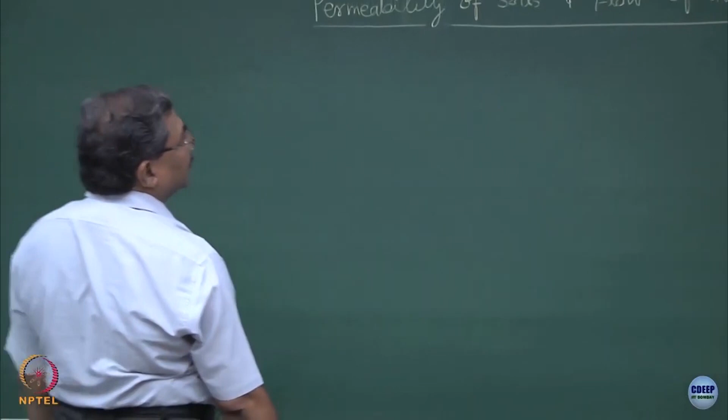So to begin with, the permeability of soils and the flow of groundwater. To make life simple, we assume that the soils are saturated. This is assumption number 1. If you do not assume the soils to be saturated, this becomes a completely different discussion which falls under the realm of unsaturated soil mechanics.

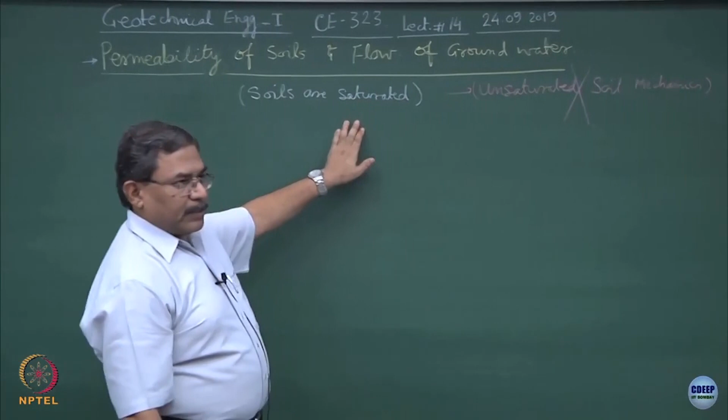At undergraduate level I will not be discussing the unsaturated state of the material, because the flow of water becomes extremely complicated and cumbersome, and I will restrict my discussion to the permeability of saturated soils, or the flow of water through saturated soils. You have enough exposure to what capillary action does, what the unsaturated state of the material does, what the dry state of the soil does, and so on.

So the best way to understand this whole process would be to recall Bernoulli's theorem, which you must have studied in your fluid mechanics course.

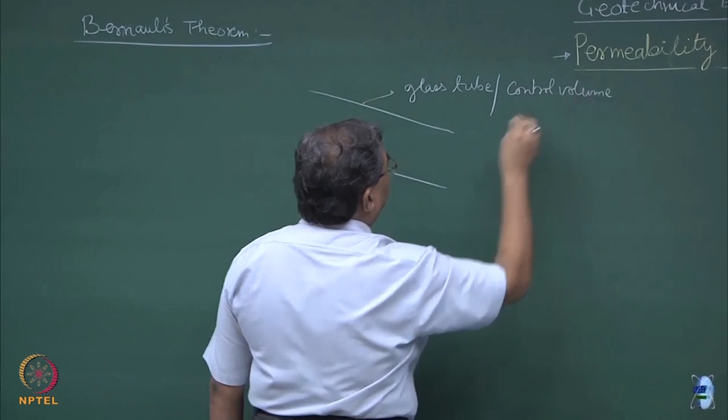Suppose if I take a glass tube, and allow flow through it, this glass tube can also be considered as a control volume. Or this could even be a pipe through which the flow is occurring.

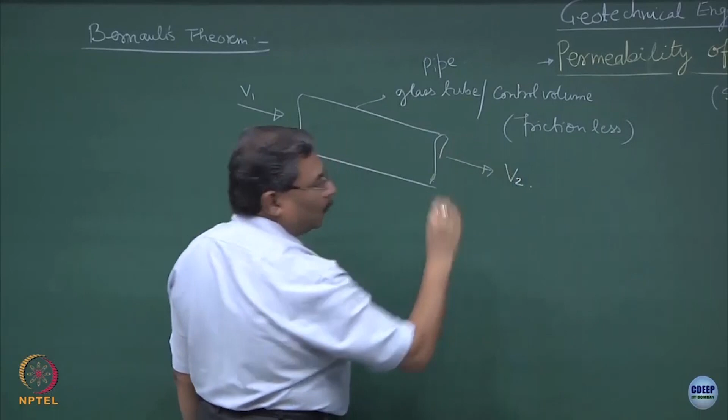Now suppose if I assume that this glass tube, pipe, or control volume is frictionless. In your hydraulics course, when you deal with flow through conduits and pipes, you apply the friction factor as a C factor, alright. But here, for the sake of simplicity, we are assuming there is no friction induced from the glass tube, pipe, or control volume. At this point the velocity is V1, and at this point the velocity is V2. If I know the area of cross section here as A1, and area of cross section here as A2...

What we are trying to do is find out what causes flow of water between point 1 and 2. I am sure you must have done this exercise. If I consider a datum somewhere here, I know what heads are acting at points 1 and 2, and the head difference is going to cause the flow to occur.

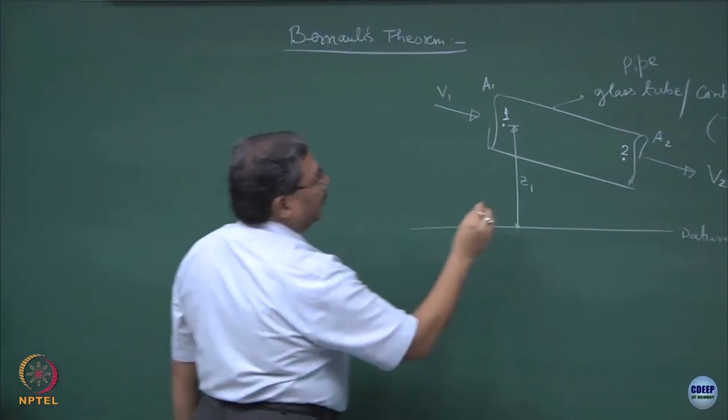So if I say at point number 1, the height of point 1 is, let us say, Z1. Now Z1 is defined as the elevation head, Z is defined as the elevation head, in meters or centimeters or whatever.

So point 2 is located, let us say, here at an elevation head of Z2. Now suppose the pressure head at this point, which I am defining as P1, and pressure head at point 2 I am defining as P2. So P corresponds to the pressure head, and the units will be the pressure units.

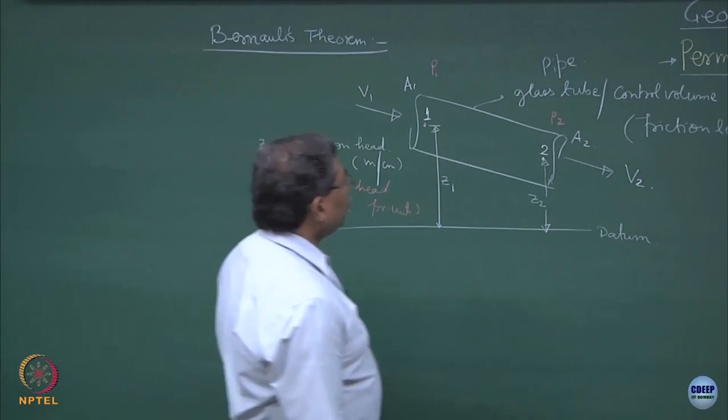If I divide this by the density of the fluid, this becomes the height of the fluid, and the pressure can be converted into the height also, alright. So we have elevation head, we have pressure head, and the third one, I am sure you must have studied, is what is known as the velocity head. Normally this is defined as V square upon 2G.

Put together, that is 1 plus 2 plus 3, is known as the total head. So if I say that the total head at point 1 is greater than total head at point 2, the direction of the flow is going to be from 1 to 2. Is this okay?

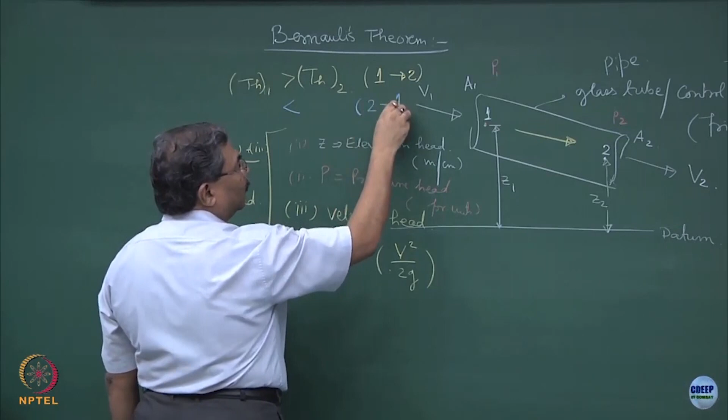However, if I reverse the situation and say that TH2 is greater than TH1, the flow is going to get reverted, it will be from 2 to 1. So what we are trying to analyze is a situation where we can establish the direction of the flow in a glass tube. This is nothing but your Bernoulli's theorem.

Now most of the time when we use these concepts in cases like soils or porous media, what is going to change? Suppose if I want to extend this to porous media. Porous media means, yeah, you have some doubts, yes please. Total head said is a general situation, okay. So your objection, but I have given A1 and A2, area of cross sections are different, so V2 is different than V1, I think this is okay.

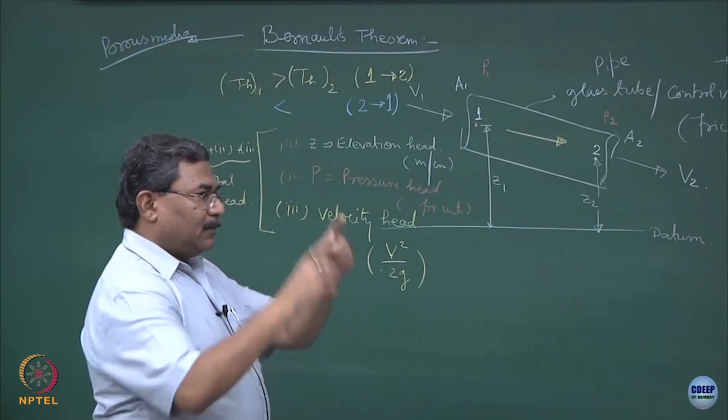Yeah, I will come to this point, just keep this in mind, alright. So for the time being there are no frictional effects, we are ignoring it, and we are trying to see whether the total energy concept can be utilized to establish the direction of the flow. Total head, always total head, velocity also has to be included, elevation has to be included, pressure also has to be included, always remember.

Yeah, I will come to that, but unless you have created a context, what you are saying is not correct. So now let me create the context, and that is what I was trying to do here. So the moment you extend this theorem to the porous media, now what you are saying is going to be correct. That means what I have to do is introduce an element of a porous media somewhere in between, alright.

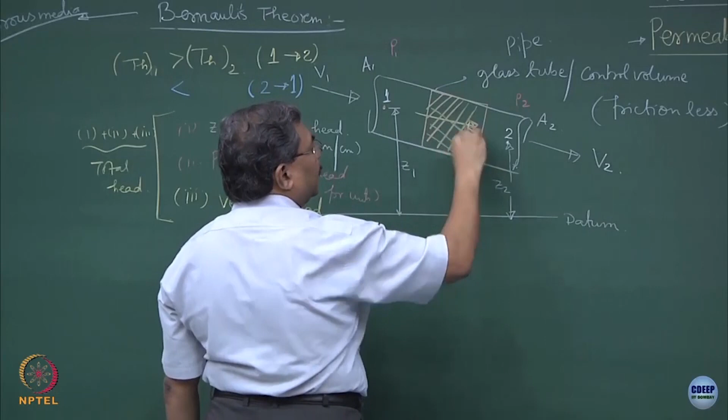So suppose if this is a compacted soil mass, what I have done is I have taken some soil in the loose form and I have compacted it within this tube to create this state of the compacted soil mass. So when you say compacted soil mass, the attributes of this control volume are going to be porosity, void ratio, gamma d. So this is a state of compaction, saturation.

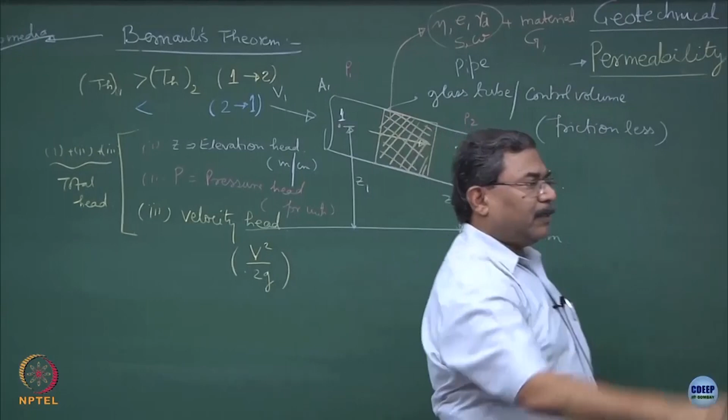Okay, moisture content, and what else, the material. Is this correct? So material is represented by, let us say, specific gravity, particle size distribution. What is the best way to depict particle size distribution here? The entire graph cannot be fitted, sorry, better than that, sorry, very nice, good.

So let us say D10, or dx for that matter, clear. Normally D10 is used to define the material, and hence we call this D10 as the characteristic dimension of the porous media. Choice is yours, you can take dx also, but when you say standard terminology, this is D10 normally we use to define the material.

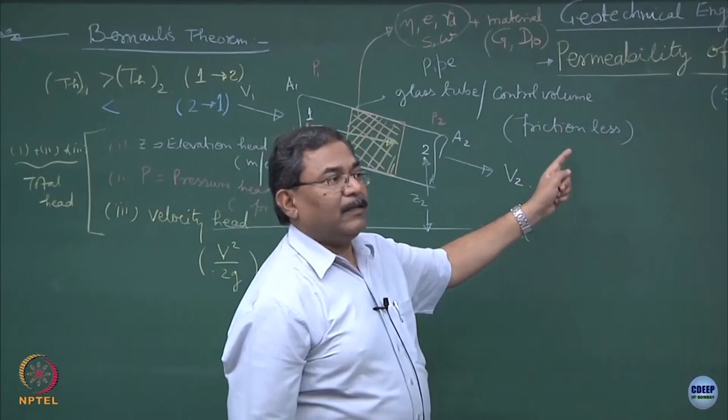So look what we have done, we started from Bernoulli's theorem and we are now extrapolating it to the porous media by including a porous media over here, fine. Henceforth now we will be discussing about the flow through porous media. Is this part okay? Everybody has followed this? Any question? Fine.

So now coming to, we have defined the porous media in the form of its compaction state and the material. Now what is going to prevail the flow? One is definitely the total energy, and the second would be the Reynolds number, alright. So we have to define the Reynolds number.

You remember what is Reynolds number? We define it as Re. So truly speaking, this is the ratio of inertial forces to the viscous forces.

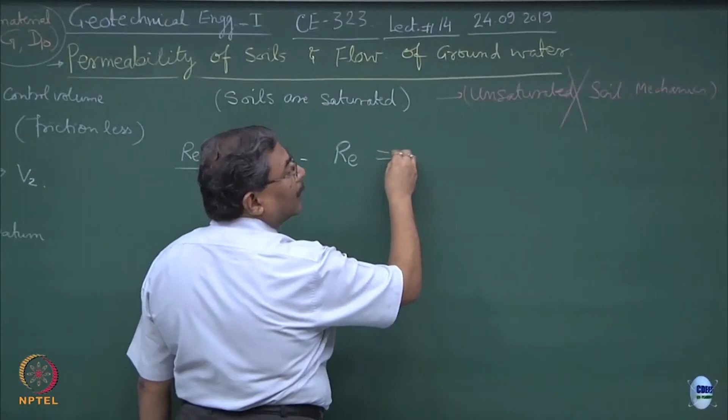Two things you should remember, never get confused. What will be this D term? Characteristic length or the diameter, correct, you are right. So I can say this is D10, and V happens to be the velocity.

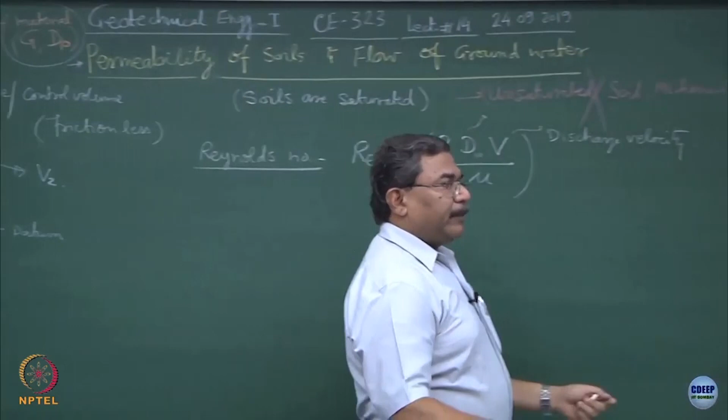So, whatever we have been talking about was always discharge velocity. Discharge velocity is devoid of the porous media. I repeat, discharge velocity is devoid of the porous media, as if porous media does not exist. What are the possibilities when porous media will not exist? The only possibility is what we call as preferential flow.

That means what is going to happen? The water... the porous media provides the resistance to the flow of water. Clear? So, everybody wants easy life. So, what seepage has done, what discharge has done? It has short circuited the sample itself. Now, this is what is known as a preferential flow.

Preferential flow is at the interface of two materials mostly. Chances are when you are compacting the sample, the contact between the glass tube, the pipe or the control volume and the soil mass is not perfect, and hence whatever discharge is taking place, this might take place through the preferential flow.

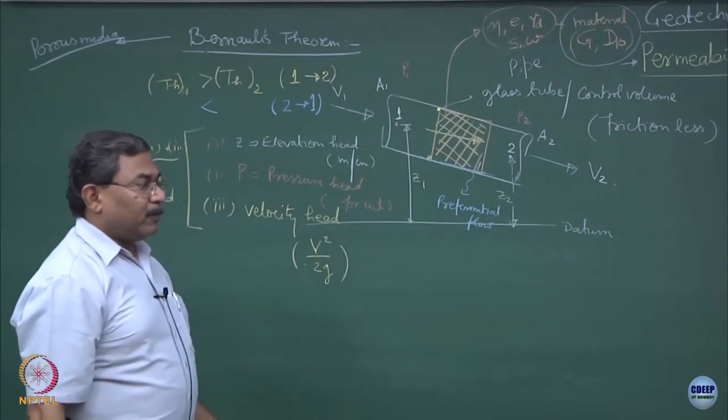However, if I curtail this preferential flow, you will ask why, how? So, I may put a rubber gasket over here, or I may put some different types of resins, or different types of lubricants or sealants. So what I will be doing is cutting off the preferential flow, and now making this sure that the discharge is going to occur through the porous media only. Is the story clear? Is this fine? Yes, please. Okay, so now I am forcing the discharge to occur through the porous media.

So, what I have done by this whole manipulation, I might have created a laminar flow situation or a turbulent flow condition. So, you are aware of what are the laminar flow conditions, what are the turbulent flow conditions.

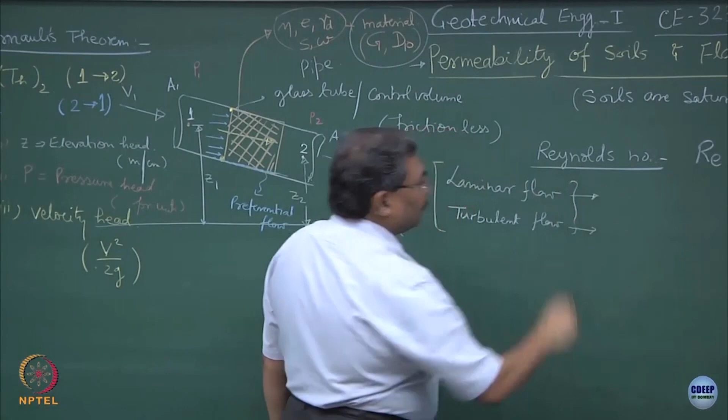If I zoom a certain portion of this sample, and if I show it over here, this is how the pores are distributed in compacted soils. So, these are the pores, and this is the soil matrix.

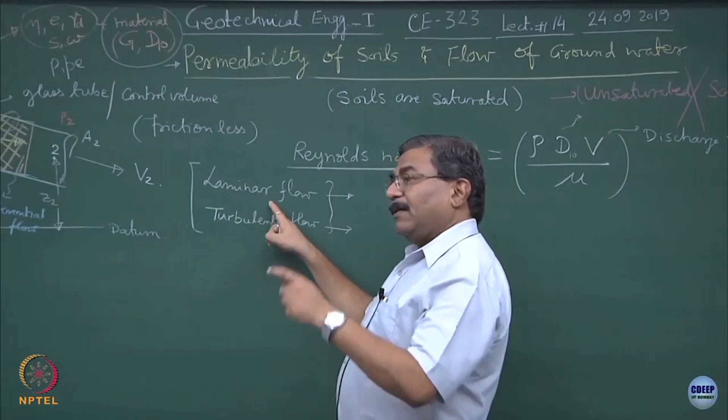As long as the flow of the fluid is parallel to all the flow paths, including the bends or the distortions, the chances are the flow might occur like this. There is a bend over here, again there is a bend, and if you take the next layer, these two are almost parallel to each other. So, as long as I ensure that the flow conditions are as if the flow paths are parallel to each other, including the bends, this is what gets followed in the laminar flow condition.

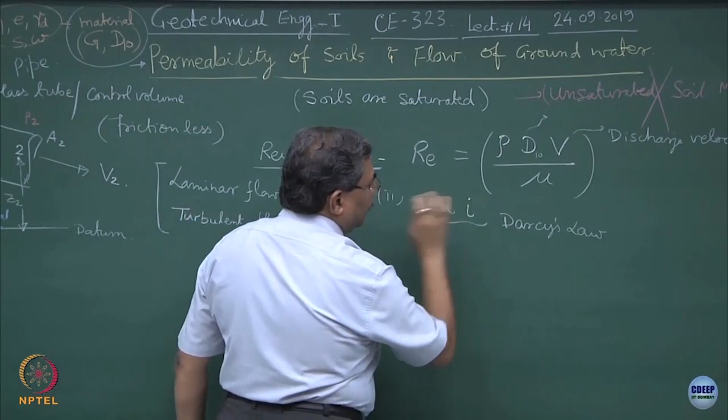The other characteristic of this type of flow would be, so this is the first condition. The second condition would be the velocity of fluid is proportional to I, and this is what is known as Darcy's law. So, Darcy's law is used normally for defining the flow through the porous media. It is a linearity. V is proportional to I, and if I say in generalized form I to the power n, this becomes a turbulent or non-laminar flow. So I will use this I here, this is Darcy's law, V is proportional to I.

If I say that turbulent flow or non-laminar flow is where this condition gets violated, this condition can be written as I to the power n, where n could be equal to 2. This becomes your non-laminar situation. The quantification of all this is done with the help of RE.

So, in case of soils, what we say is RE is less than 1. In your pipe flow or the flow through the conduits, you have taken laminar flow condition up to 2000, is it not? RE is less than 2000 is the laminar flow.

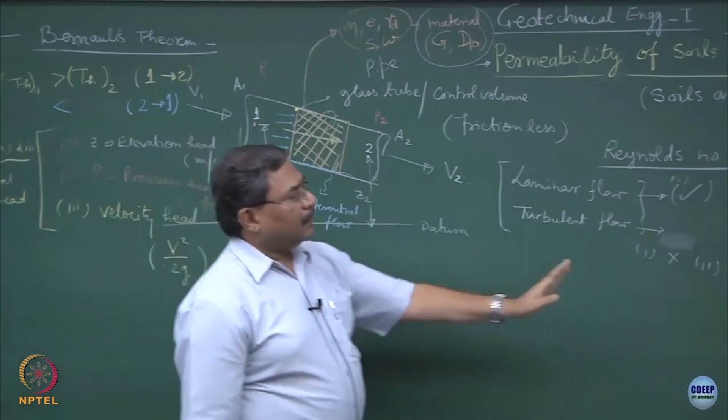So, what I have done, remember, we started from a pipe conduit and then I have stuffed this with the porous media, and I have created a situation where I have forced fluid to flow through the porous media and not get short circuited. Clear? Under all these circumstances, these are the assumptions or laws used to define the flow through a porous system. So, there are several ways of doing this. What you have to establish is, you have to just say whether RE is less than 1 or not. Density of the fluid is known, rho is the density of the fluid, mu is the viscosity that you know for the fluid, D10 you know, why?

Because you know the material characteristics, specific gravity and D10 from the particle size distribution curve, and at what stage you have compacted it. So, stage of compaction is gamma d, moisture content; if gamma d is known, porosity, void ratios are known and saturation is known. So state of compaction and the material is getting depicted here.

What fluid is passing through this is getting reflected by 1, 2 and 3. In other words, what we are studying is the interaction between the porous media and the fluid flow.

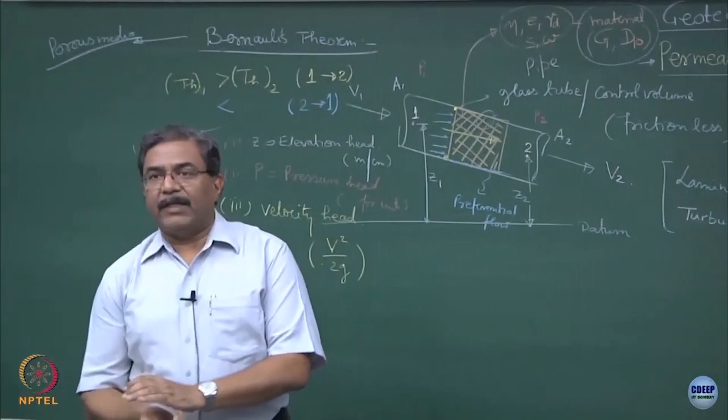Now this concept can be utilized by chemical engineers, civil engineers, hydraulics guys, petroleum geophysicists and so on. Their fluids are going to be different. Flow of hydrocarbons through the sediments, one case. Flow of sludges through filters, another case. For a biotechnologist, a solution having all sorts of bacterial activity, microbes in it, and trying to filter it to create a clean solution for various applications.

The concepts remain the same. Yes, we call this the characteristic length of the porous media. D10 is known as the characteristic length.

We never talk about the third dimension because all these tubes are going to be infinite in length, agreed? So it depends upon how long the porous media has been created, and I am not interested in that. What I am interested in is at this point what is happening, and if I am doing very precise modeling using a supercomputer or something, I will try to see how D10 is changing all along.

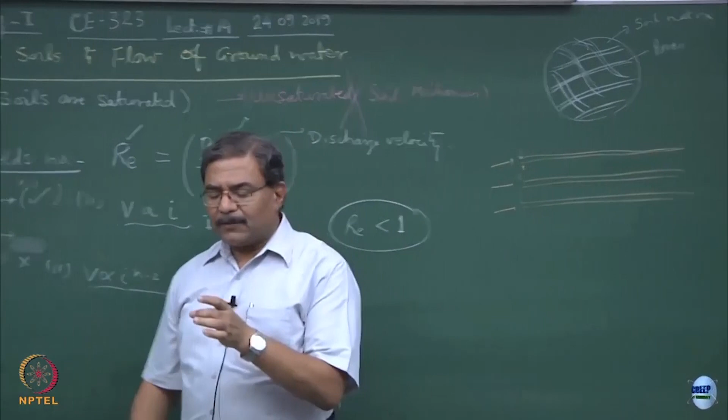But imagine you have a compacted soil mass and you have to see, realize and measure how the velocities and the pressures are dropping within the sample. It is going to be extremely difficult. We will discuss these things today.

So for the time being, we are not interested in lengths of these things, we are just interested in the characteristic diameter which is going to cause the flow of fluid into the porous system, and hence D10 is good enough for me. Why? Because D10 is going to define... yeah, that is a good question.

So now suppose if I say that this is a particle arrangement, what is the D10 here through which the fluid will flow? Yes, you are right. So this is the open space, and this space is going to depend upon the particle diameter. So these are the complications.

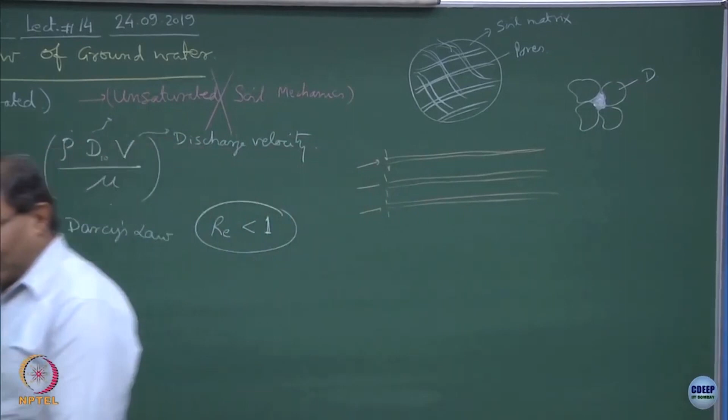I hope now you are realizing that flow through porous media is not a very simple subject. So now you are heading towards complication. Your next question would be, what is the relationship between D and this? Another question would be, what about the shape of the particles? Another question would be, how about the tortuous lengths and so on. So this is an evergreen topic to work on, and it has a lot of commercial value.

Okay, for the time being this is fine. Yes, please, anything else? Okay, so let us go ahead.

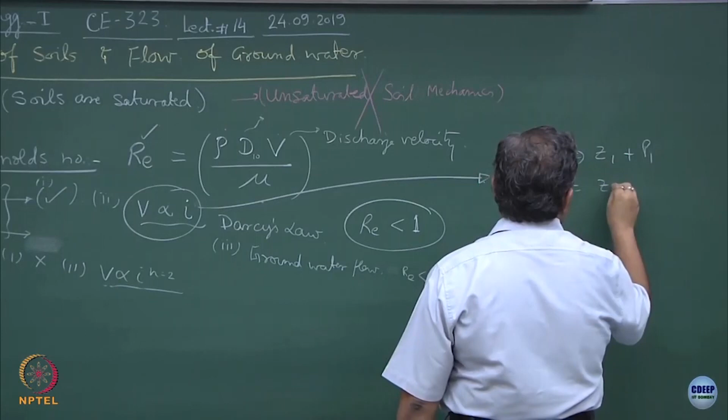If I say that TH1 is equal to Z1 plus P1, and TH2 is equal to Z2 plus P2, and if I put a condition that delta TH is positive, so it's inbuilt that Z1 plus P1 is greater than Z2 plus P2. Even if I rotate it and keep it on the horizontal plane such that Z1 becomes equal to Z2, what I have got rid of is the elevation heads, agreed.

So that means under these circumstances, when Z1 is equal to Z2, what I am saying is P1 is greater than P2. The pressure head is causing the flow of water to occur through the porous media, clear. And the easy way to understand this is by using a term known as I, the hydraulic gradient.

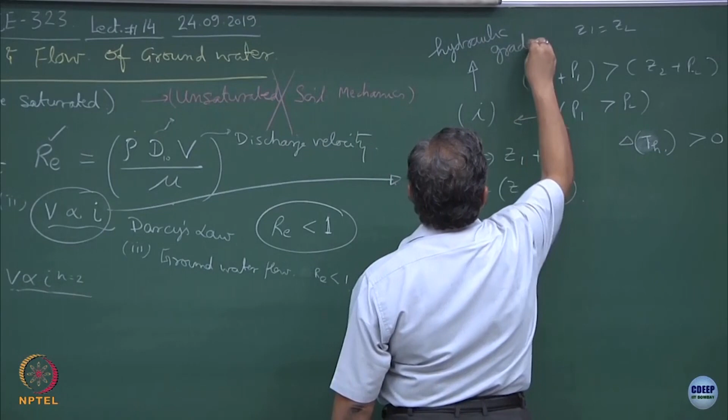So what is I? I is equal to delta P, divided by length of the sample, and length of the sample is, let us say, L.

Now how would I read this? One of the ways of reading this would be: P1 is acting at this point, or total head is acting at this point, total head is acting at this point. We have done some mathematical manipulation to get rid of Z2, it does not matter even if I include Z2. As long as the flow is taking place from this point to this point, energy at this point is higher than energy at this point, and the dissipation of energy is taking place per unit length of the sample.

So hydraulic gradient is the term which is defined to show how pressure is getting dissipated over a certain length of the sample.

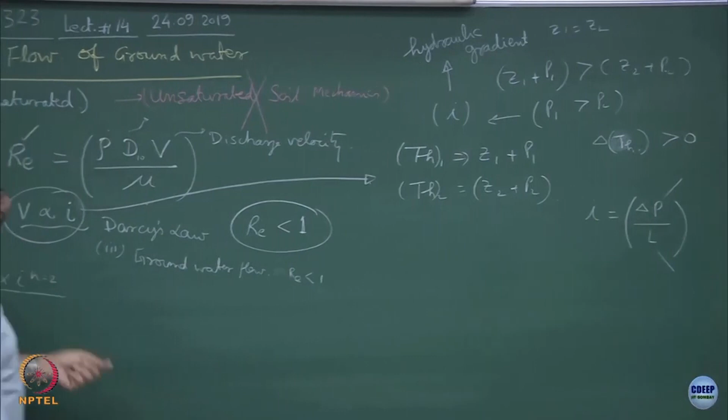Now your question is why it is not negative, okay. So what we have understood until now is V is equal to K into I.

Sometimes K is also known as Darcy velocity or Darcy's permeability, Darcy's coefficient also we call it as. We also call this as hydraulic conductivity, coefficient of hydraulic conductivity. Sometimes people also call this as the coefficient of permeability. It has different names.

This is the proportionality constant. What we have done is V proportional to I, we have changed to V equals K into I. Now suppose if I say it is I to the power n,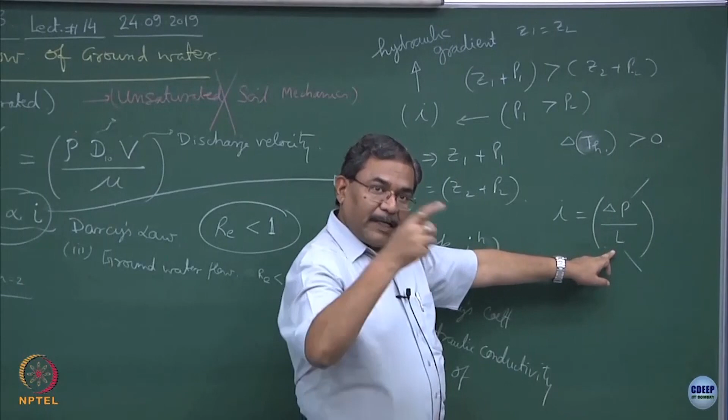I cannot be negative because what is the flux which is acting across the 2 points? A1 into V1, correct. So it is the flux which is getting dissipated in length L. This is another interpretation. So flux has to be positive gradient, agreed.

As long as the saturated soil is concerned, remember the moment this becomes unsaturated it is a different case altogether, so we are not talking about that situation. So as long as delta P is positive getting dissipated along L, your velocity of flow is going to be proportional to the hydraulic gradient, agreed.

It cannot be the reverse of that. What it says is if I increase the hydraulic gradient the velocities are going to be more, and vice versa, and that is true.

So this term now we have agreed that I will be positive. I can write another expression that Q is the discharge, and this is equal to velocity into area of cross section. So Q will be equal to K into I into A, alright.

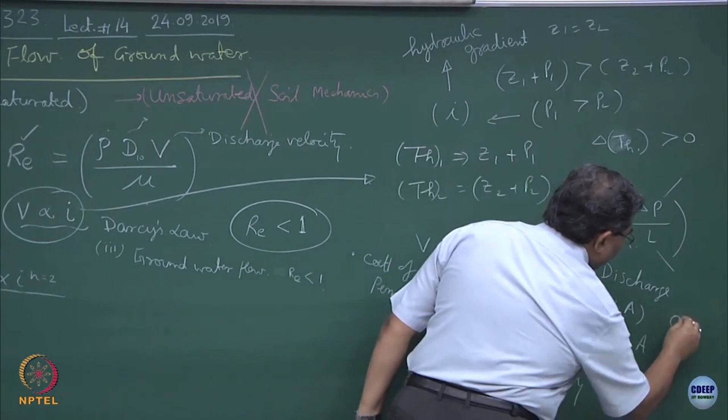And for your quick reference, if I say Q upon A, what is Q upon A? The small q. So small q is nothing but the flux.

Now, in today's world, how these equations are being manipulated, please understand in 2 minutes. We are talking about here all fluid flow, clear. What I have to do is, I have to apply a flux gradient to cause the flow of something.

Is this correct? So the guys who are working in the field of electromagnetism, what they will be doing? They will be applying electric field gradient across the sample to pass current. Chemical engineers, what they will be doing? They will be applying concentration difference across the 2 points to create a diffusive current.

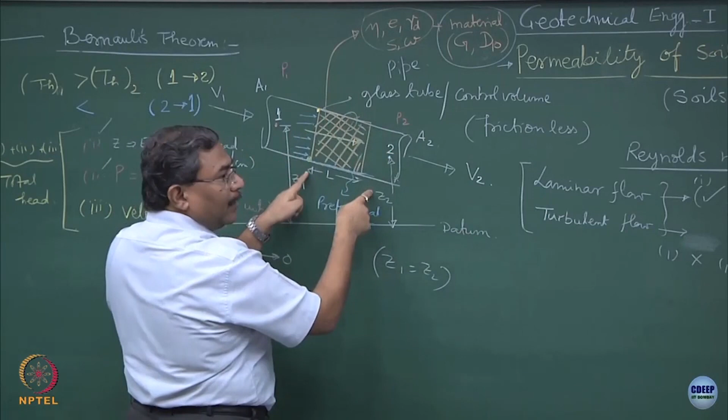Agreed? C1 concentration of chemicals, C2 concentration of chemicals, delta C upon L is nothing but the driving force which is equivalent to the concentration gradient, and I can compute everything like this. Only thing which is going to change is K. So here K was Darcy's coefficient, hydraulic conductivity, permeability coefficient; there K will become diffusion coefficient.

Is this part okay? This is in market right now. Everybody is trying to do extrapolation of these things in different energy field concepts to cause the change in the total head. Yes. How can I manipulate the total head? Tell me. One of the ways would be I can lift this up, but it is not going to help. Why?

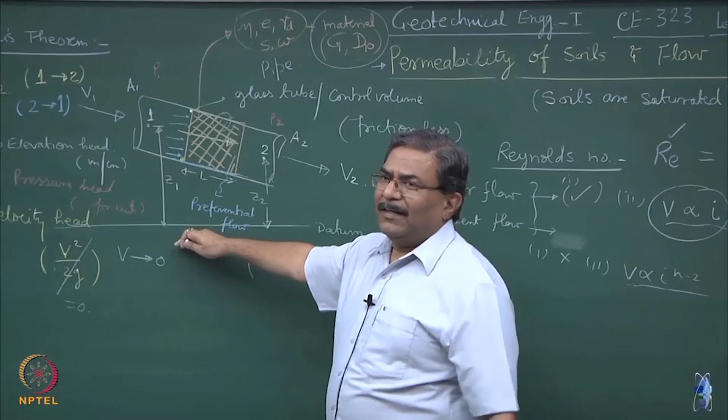Clear? So now you have to do an experiment to find out how much pressure is getting delegated at this point, which is definitely going to be less than this. So what have I done? I have done one manipulation to create a different type of total head at this point as compared to this point, and that is my requirement. Is this funda clear?

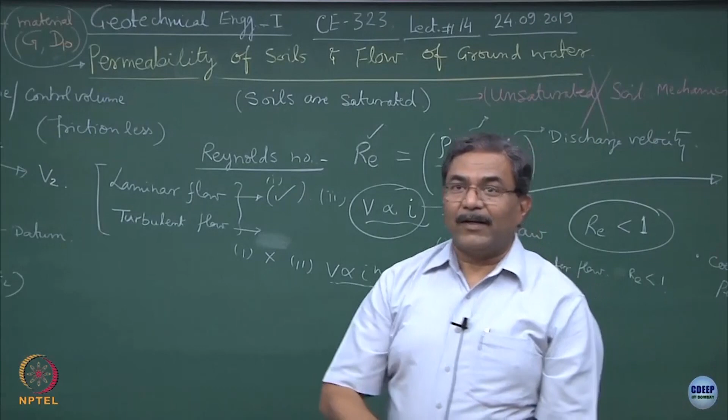What could be another way? Suppose if I rotate the whole system, now what is going to happen? That is a trick. Are you getting this point? So suppose if I rotate the whole thing, so this point always sits above this point, agreed?

Head at this point, elevation itself is going to be higher than elevation at this point. So the discharge is going to take place from this place to this place. Another manipulation. Okay. Imagine now hundreds of situations like this and go ahead with the engineering.

There is another good application of D10 which you might come across in some books. You know, there are people who tend to find out K. Now the question is, how would I get the K value? So let us discuss this a bit. So, determination of K.

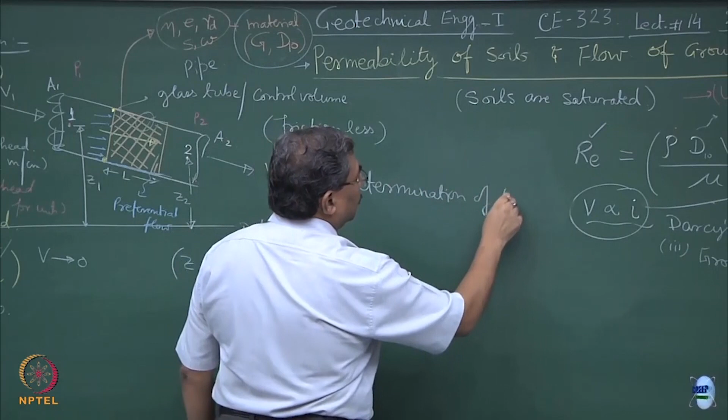Please make sure that you write small k, because later on I will be using capital K intentionally for something else. So, right now I am dealing with all small k's. Do not mix up small k with the capital K.

There are different tests which you can do. Some are laboratory tests which you will be conducting in the laboratory, known as constant head test and falling head test. These are the two most prevalent tests.

Anybody doing centrifuge modeling here as a BTP or whatever? No? Centrifuges are also utilized to get the hydraulic conductivity. We have done a lot of work in this field, so you can check the theses and papers written by A.K. Gupta, myself, and some of your seniors who were doing BTP with me. Anup Ramchandra Rao, he is the guy who has done a lot of work, he was my BTech student. I will show you what he has done. So you may use the centrifuge modeling also.

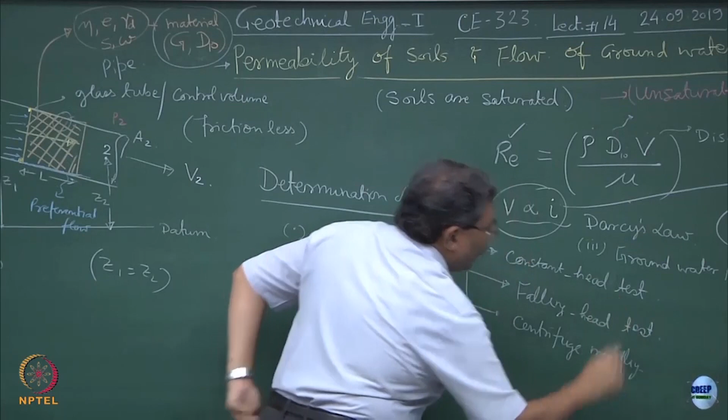What essentially these tests are: the first test is a constant head test, number 2 is falling head test, number 3 is centrifuge test. In a centrifuge I can do both tests 1 and 2. So, in the first one, what we do is known as constant head test. Normally this is performed over granular materials.

Granular, why? Because the permeability is so much that if I make a control volume, just now I was talking about rotating the whole setup by a certain angle so that it becomes like this. So, suppose this is my porous media or the sample which I have prepared, this is the soil mass, compacted soil mass.

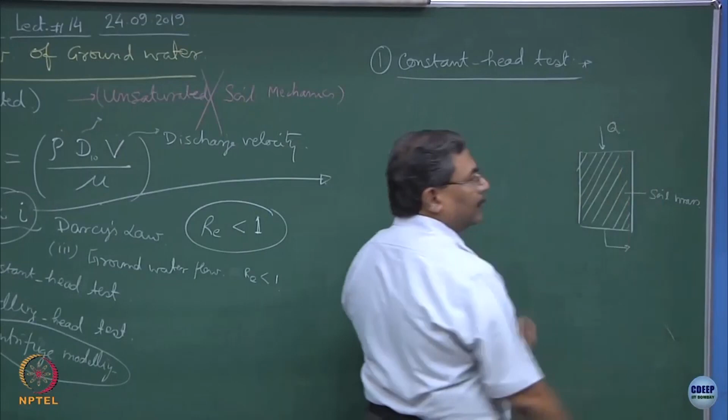Now, the principle is like this: we allow flow of water to occur by maintaining the head constant here, so head remains constant. I was explaining why porous media has to be granular when you conduct constant head test, because the permeability is so high that unless you maintain the constant head, the hydraulic conductivity values are going to be incorrect.

So what we do normally is connect it to a reservoir, there will be something like this connected to a reservoir, and this reservoir will supply the constant pressure head at this point, and the discharge takes place here, and we measure this over a period of time. Then from here we can compute K value. If you measure Q, hydraulic gradient can be obtained, area of cross section is known, velocity can be obtained, or K can be obtained directly.

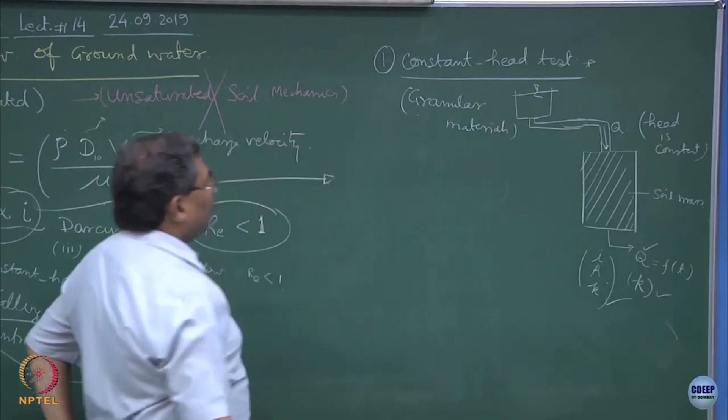Simple test used normally for granular materials, because of their high permeability. The more challenging is the second one, which is falling head test.

This is normally done on the materials or soils which are fine grained. Why? Because the permeability of fine grained compacted materials is going to be extremely low, so you need not maintain the pressure always, i.e. constant head.

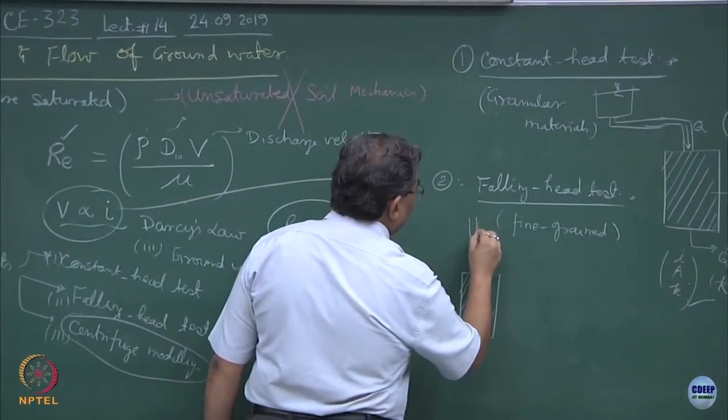So here what we do is expose this system, this is the control volume of soil which I have taken or made, and this will be connected to a graduated glass tube. So here you have graduations; we fill it up with water after compacting the sample to a certain moisture content gamma d, and we wait for this water to drop over a period of time, and we measure Q value. So this Q is also a function of time.

One thing you can appreciate here is that the total head which is causing the fluid flow is decreasing, is it not? You agree? So delta H is negative. This is the experiment which we will be doing in the lab.

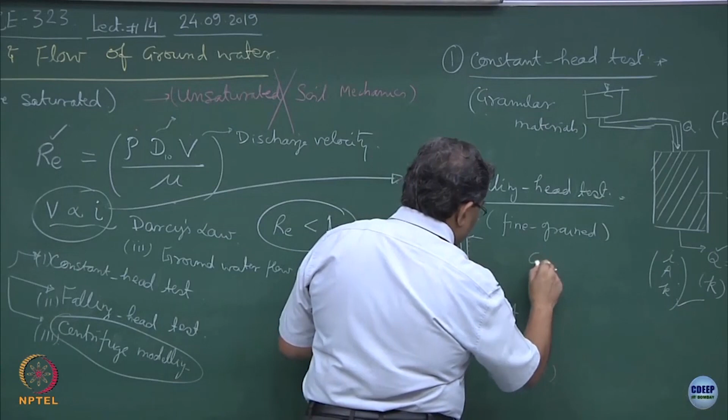So if the area of cross section of this tube is known, let us say small a, and the area of cross section of the sample is known as capital A, you can do the continuity equation. This is nothing but continuity, is it not? So the continuity equation will be: the Q which is dropping down, or the discharge which is taking place, is entering into the soil sample, and hence Q in the tube will be equal to Q in the sample.

Is this okay? Q in the tube is not a porous media, so this is only the area of cross section multiplied by the velocity. What is the velocity in the tube of the falling water level? Del H by del T.

Is this okay? Negative sign. Why negative sign? Because H is decreasing. Clear? So this has to be equal to Q of sample, permeability of the soil mass, multiplied by I.

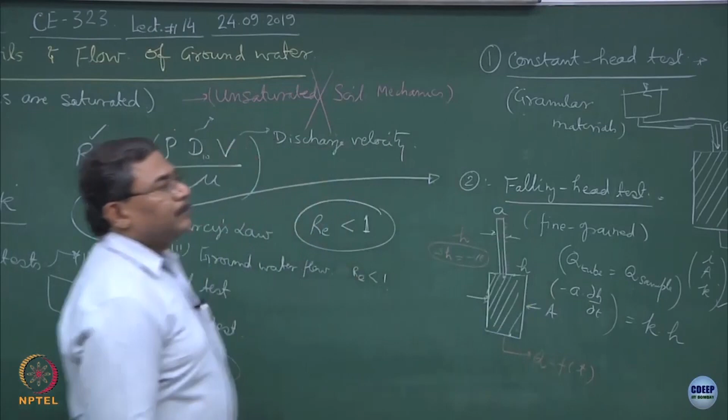What is causing I? H, the hydraulic gradient at a given time. So what I am assuming is that the head difference across this point is H, though H is decreasing, and that is what I am getting reflected over here, multiplied by K into H upon L. L is the length of the sample, physical dimension of the sample, alright.

So, K into I into A, solve this expression and get the value of K. You understood?

In this expression, because I am doing experiment, I can find out as a function of time how H is changing. I can record the values and I can measure the discharge. So H is known for a given instance, L is known, area of cross sections are known. You solve this thing, this comes out to a log function.

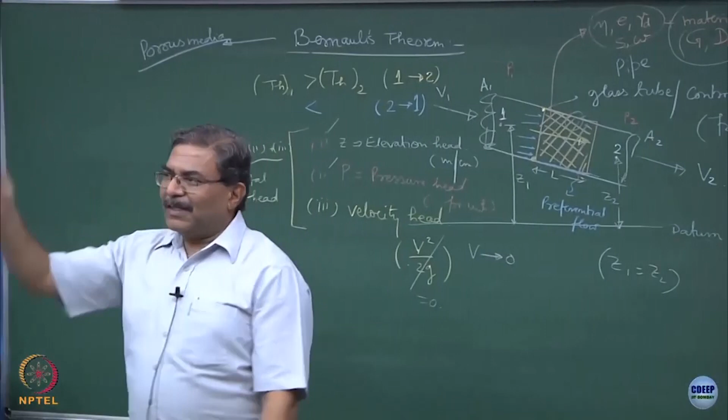This is okay. Remember, the dimensions of K are going to be velocity dimension. I hope you can realize this, because in this expression V is equal to K into I. So I is a non-dimensional term.

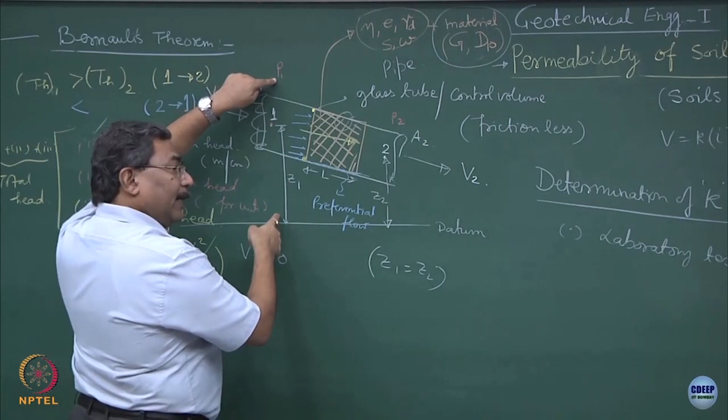Pressure can be equivalent to the height, elevation is height, clear. So this is the height term, normally we deal with heights only. Similarly, at this point divided by L of the sample, which is a height. So I is a non-dimensional term.

Hence, K is mostly in meter per second unless specified. Is this okay? So what we have done is we have obtained the K value in laboratory setup.

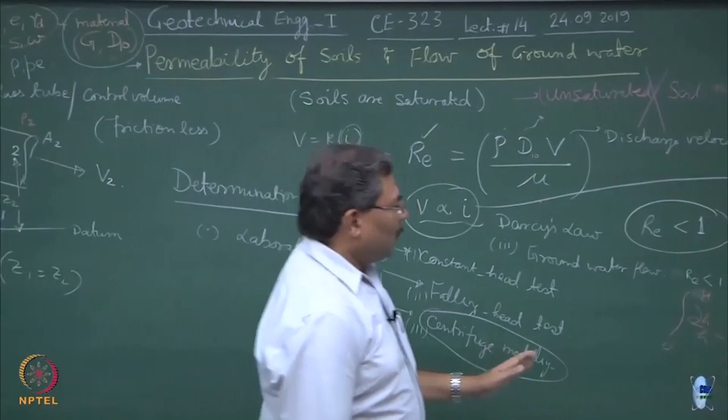You are assuming that whatever head is dropping over here, delta H, alright, that is this value. So velocity is delta H upon delta T multiplied by area of cross section, this is the discharge, and this discharge goes into the sample, continuity, that is it. H is the head, H is the head. So I will introduce this concept slightly later, alright. So if the head is causing the flow to take place, this is the equation.

Now what I can do is, I can make miniature models of these setups, install them in the centrifuge and do the test. So that is what most of the Japanese, Koreans and Americans are doing, yes.

This is your K into I. What is causing the hydraulic gradient? The head across the sample. I can do a manipulation, I can keep the datum over here, everything becomes 0 at this point, total head at this point is H, this becomes H upon L.

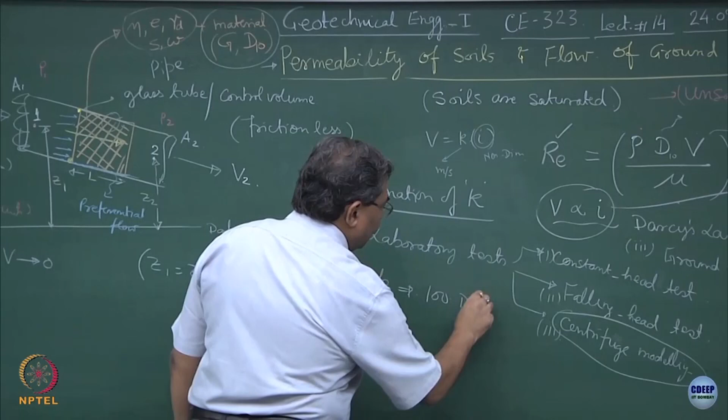So another way of finding out K is what some people are using, particularly consulting people. They use an equation 100 times D10 square. This is in centimeter per second. You will find this type of equation.

Unfortunately, these equations are valid only for granular materials, though they are extending it to the fine grained materials also, because D10 is being used. So let us remove D10 from here, make it as D square. So let us take a simple case so that you can follow and get rid of all your doubts.

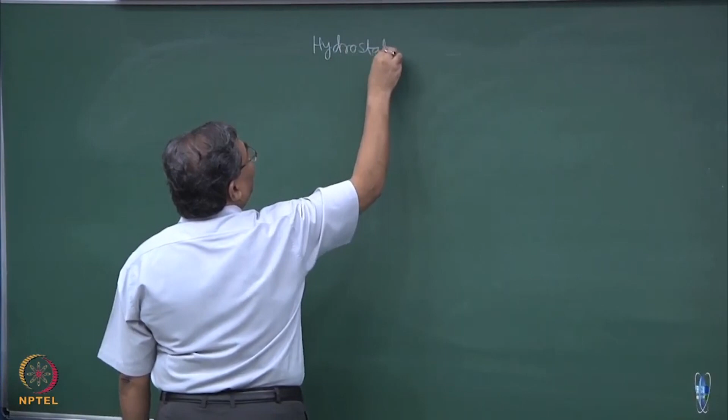Suppose if I take a case like this, suppose there is a vessel, and in this vessel water is filled up to this point. I give you 2 points, let us say one is here, another one is here. Show me what is the direction of the flow. So the best formula to understand these type of things is fix a datum here, compute the point number 1, point number 2, let us say elevation head. What is the elevation head at point 2?

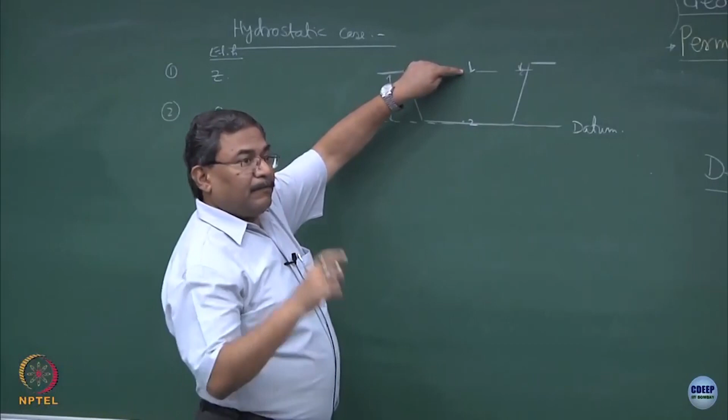What is the elevation head at point number 1? To make life simple, let us make it at the atmospheric surface itself, the piezometric surface - you remember piezometric surface - where atmospheric pressure and temperature conditions are acting. What about point 1? Elevation is Z, at this point elevation is 0.

What about the pressure head at point 1? Atmospheric is acting here also, by the way, 0, you are right. What about the pressure head at point 2? Are you sure?

Why? Take a piezometer here, install it up to where the water level will go, height Z. Simple rule: always put the piezometer or a tensiometer, clear? Up to what height it goes? Clear? What is the total height?

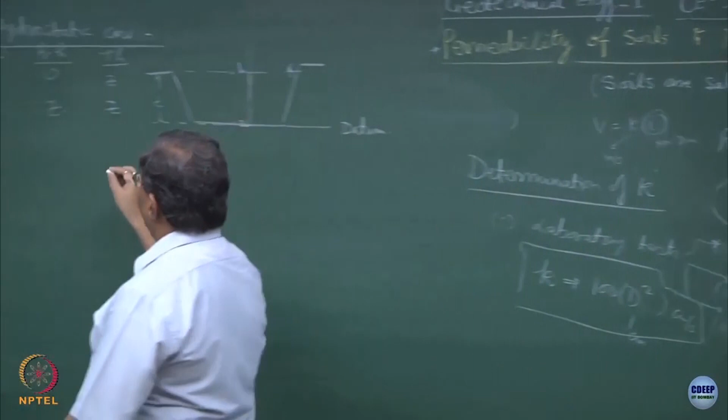What is the pressure gradient? What is the hydraulic gradient? Followed? So, I is 0. What is the meaning of this? This is a case of a hydrostatic problem, agreed. I can do different types of manipulations over here, clear.

The real fun is the moment porous media comes into the picture, because as long as porous media does not come into the picture, there is no fun. This is a hydrostatic case. I will induce flow through the porous media by - you remember that tube which I had plotted - just tilt it a bit. So, this is case

A, and now let us talk about case B. This is the porous media, this is the water level, and this is kept in the water bath. So here I am showing this as the free water surface, this is the free water surface.

Now, how do I maintain it is my headache. I can connect this to a reservoir upstream, and downstream I can connect it to another reservoir, it does not matter. This is all redundant as long as I have the pressure conditions over here. Now, let us say point number 1 and point number 2, do the same analysis.

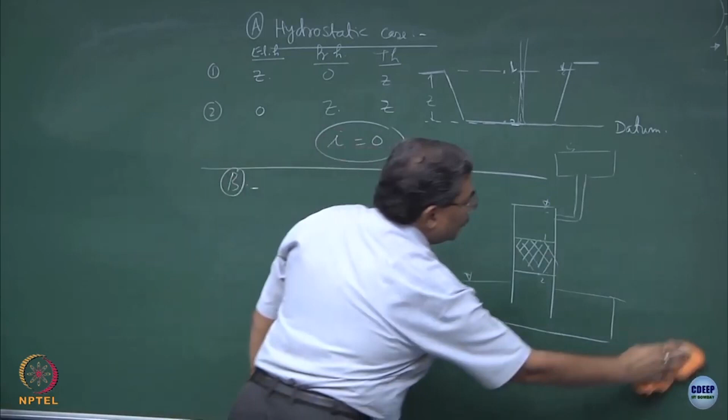Suppose if I say L is the length of the sample, area of cross section is known, material properties are known, this is the height H, okay, and at this point suppose this is Y. Let us do it one by one.

What is the elevation head of point 1? So, select one datum, correct. Datum is normally to eliminate all this; what I can do is put the datum here itself, this elevation and all, agreed. It is your choice, you can put the datum here also, but then it becomes more complicated.

At point 2, what is happening? What is the elevation head? 0. At point 1, this is L.

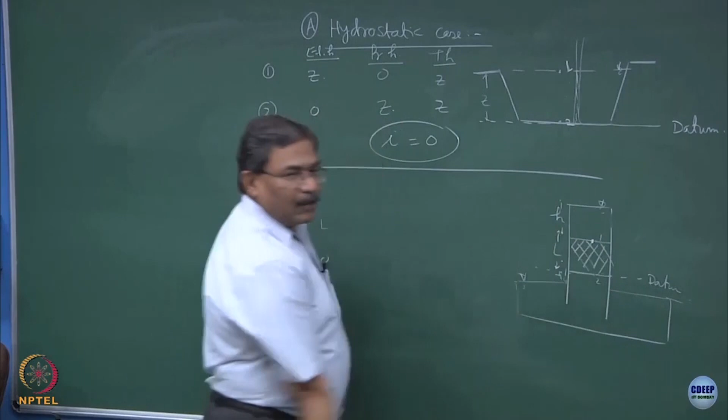What is the pressure head at point 1? How to compute pressure head? Please understand this, do it in your notebooks. Use the piezometer, the small tube, fix it over here - up to where will this go? Fine, H height.

What about this point? H plus Y. You are right, but why? Have you understood this or was it a guess? Why? That is an interesting thing.

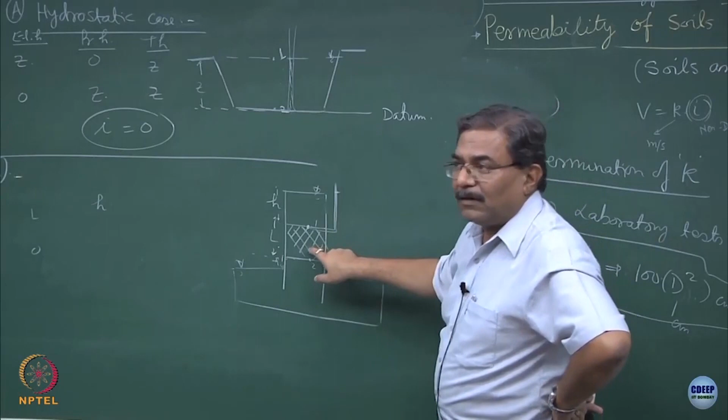So, until now whatever you have studied - saturation, partial saturation, variably saturated case - remember tutorial number 3 where I created S as a function of depth and specified saturation limits. As long as this happens over here, your answer is wrong. Is that correct? However, the moment you assume the whole thing is saturated, after a steady state has been achieved, clear?

Now, if you put a piezometer over here, you have two options. What are the two options? This is atmospheric, this is also atmospheric. Are you getting the point? This point is connected to atmosphere, is it not? So let us do it in a simple way.

If I shift my datum over here, what is the position head at this point? This much. If I put a piezometer here, where will it go? This is what you have to understand: it can never drop. Even if I put a piezometer here, what is going to happen? It is going to go up to this level, it will never drop down.

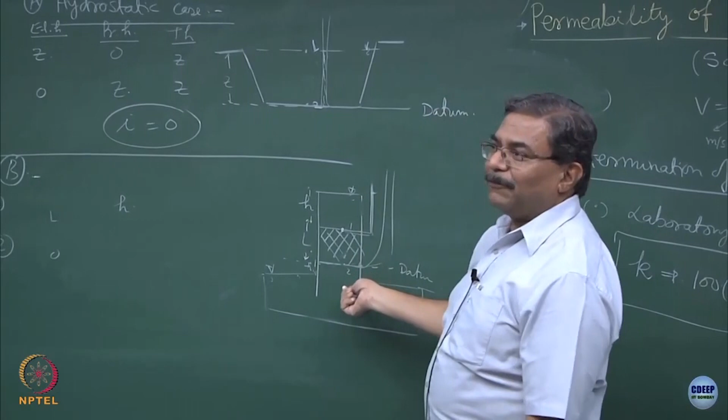So please do not get confused with this. That would be capillary action. When you have negative tension zones developing in the system, only then will the pressure at this point try to get nullified with the atmospheric pressure. As long as this pressure and this pressure are atmospheric, the only possibility is that if you put a piezometer over here, it will go up to this plus this. Is this funda clear? So your answer was correct, but have you understood the thing? Chalo, it's okay.

Everything is under positive pressure. There is no reason that the pressure will drop from here because the entire thing is exposed to the atmosphere. This surface is same as this surface as far as the pressure conditions are concerned. These are basically isopressure points. There is no capillary - remember, this is the glass tube, this is the soil. I am just talking about the water body in which the glass tube is dipped. The complication I have done is I have raised this level a bit so that here also you have water.

But truly speaking the pressure at this point and this point is all atmospheric. So what do I have to do? Either I have to reduce the size so much, make it a capillary tube. These are finite dimensions, not infinitesimally small. So capillarity does not come into the picture. Second thing is we have assumed that the system gets saturated over a period of time, so this soil is completely saturated.

Now you are connecting the whole system like this. What I am trying to expose you to is the concept of understanding what pressures are acting across the samples. Atmospheric is acting here also, atmospheric is acting here also, that gets nullified. Now what is over here is the elevation head plus pressure head because of this water column. Elevation depends upon the datum, so elevation is 0 here. And what is the total head? This plus this, because of the pore pressures.

So let us write here the pressure would be H plus L. So what happens to the total pressures?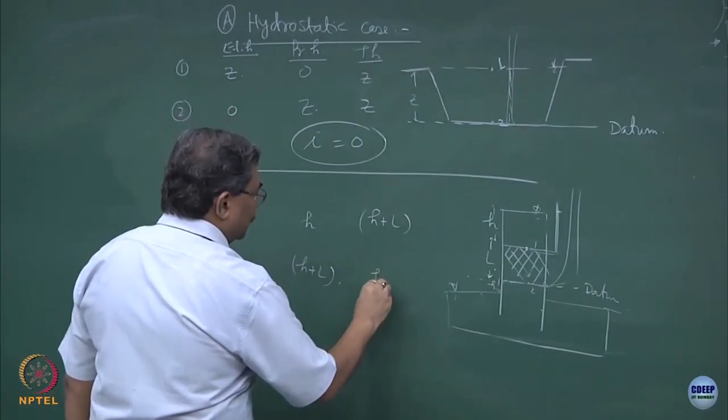See, again I have created a situation where the flow is not going to take place through the system. Why? Because he said that at this point, what is the total head? He said H by L.

So one of the ways to come out of the whole situation would be if this whole thing is placed in a water bath like this. What is the total pressure at this point? So this is the L, yes. So what I can do is assume this water column of delta H, a very infinitesimal volume, and assume that this is the head acting at this point, which is variable. So now it is alright.

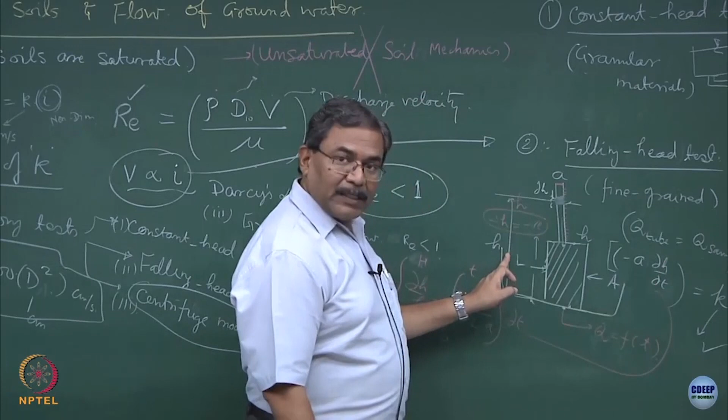So as your H changes, this is the velocity through which water is getting discharged in this tube, area into velocity of water. This H remains universal, this H is also acting on the sample, this remains H. What is causing flow to take place? H. So H upon L is the hydraulic gradient, area is the cross section.

I have generalized the whole thing, I do not care what is the pressure acting at what point. I am simply saying, as far as this is a datum, I am assuming everything from this point to H, which I can measure. And the moment H is measured, H is generalized. So rate of change of H in the glass tube is nothing but the velocity of water discharge multiplied by area of cross section.

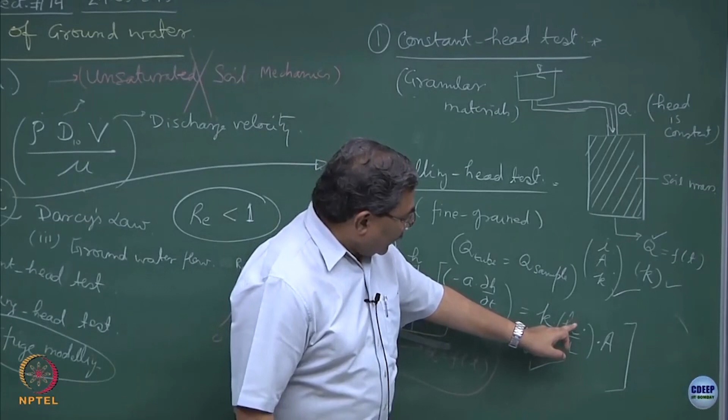And this H is also causing discharge to take place through the sample. So this becomes H by L, i, into K, into area of cross section. H by L is the hydraulic gradient which is causing the flow to occur, because delta H of H is causing the flow to take place. A small change in the height of the water column is your velocity component, and that small change in H is also causing the hydraulic gradient acting on the sample all the time. So now your question is what?

Repeat it - integration. Choice is mine. I might be doing this experiment to measure H1 and H2, and the fall from H1 to H2 is in a given time t, that is it. Got it? So basically this is going to be from H1 to H2, in a time 0 to t.

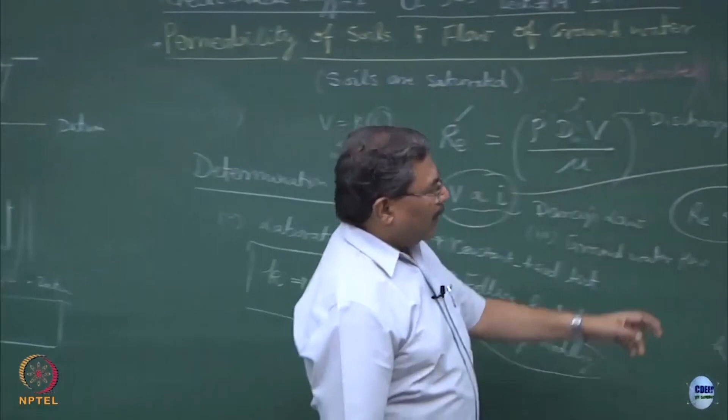Now the rule of the game is, normally we do not allow significant changes in the head to take place. Why? Because we are talking in terms of infinitesimal changes, delta H. So truly speaking, delta H should not become a meter, because by the time the entire water passes through, H is getting drastically changed.

So if you look at this expression, discharge in the tube, though it remains same as the discharge in the sample, truly speaking H is decreasing, and when H is decreasing, what happens to Q? Q is decreasing. So you are doing a test where the hydraulic conductivity, or the parameter you wanted to obtain, is a function of time or a function of head - not a very good thing.

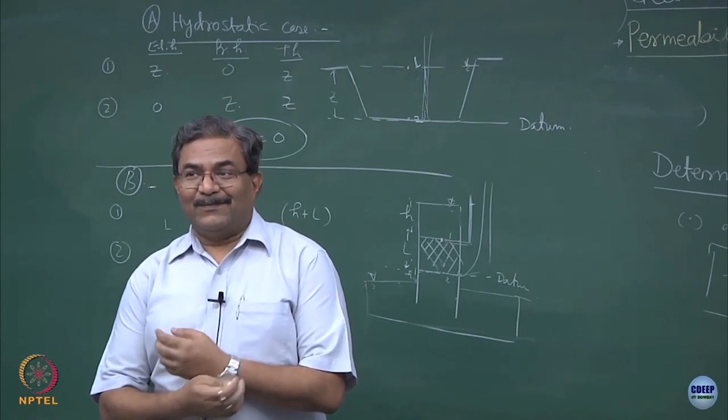Now, let us restart this business. Now, using all these concepts, where these concepts are being used, number one, and what type of questions are being answered, I am just trying to show you. Concentrate a bit.

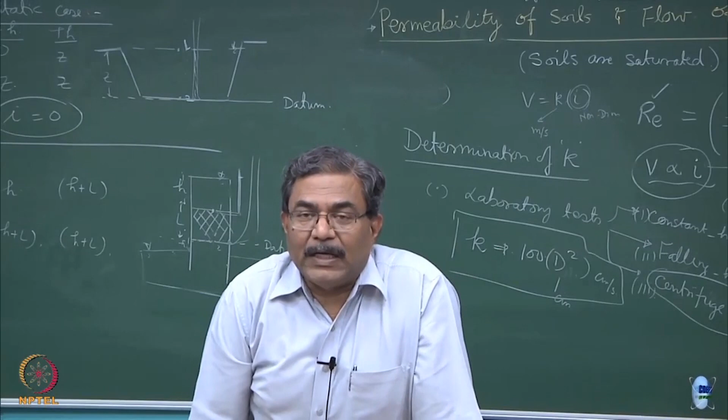We will answer that sand boiling phenomenon also. If you remember, in the first lecture you had sent a movie, correct? So now you are going to get the answers to all those questions, what seepage does to the soils. So if you type on the net 'sand boiling', this is what happens when an earthquake strikes.

And if you really want to do the analysis of these type of situations, what we are studying here is a static case, though this is a hydrostatic case and I am trying to convert this problem into a flow through the porous media case. A real dynamic case will come when an earthquake strikes the deposits or the soils and tries to liquefy them.

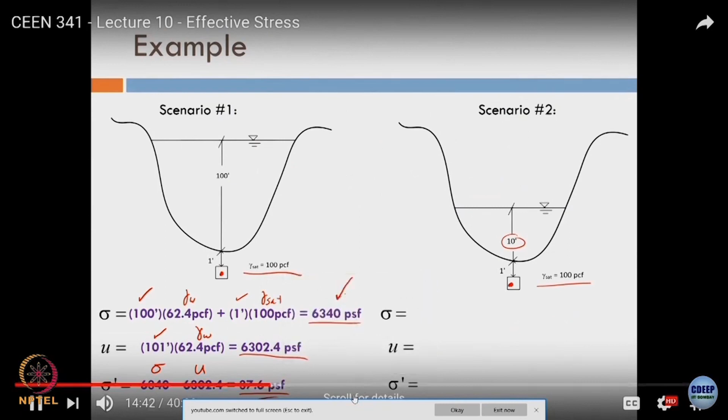It is a beautiful example of how the pore water pressure rises and how it gets changed when the water table changes. Another interesting PPT is on levees which are founded on peats and organic soils.

We have been talking about land subsidence in the very first lecture. So the more and more water you draw for irrigation purpose or for commercial purpose, the whole thing might subside and ultimately failures might occur. So the embankments have failed because of the subsidence of the ground.

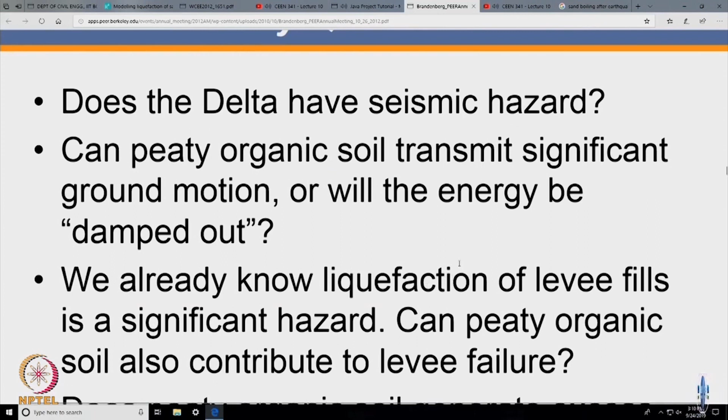You remember we were talking about delta formation, sedimentary deposits, and whether they liquefy or not because of the earthquake. Though peat soils are cohesive soils, they are also bound to liquefaction.

There is a lot of research which is being conducted in this context, and here the question has been: does the delta have seismic hazard? And the answer is yes, because they have done the seismic hazard mapping and they have shown that it fails. So this is the influence of the earthquake which they are studying on the soil mass, and this is how the modeling has been done.

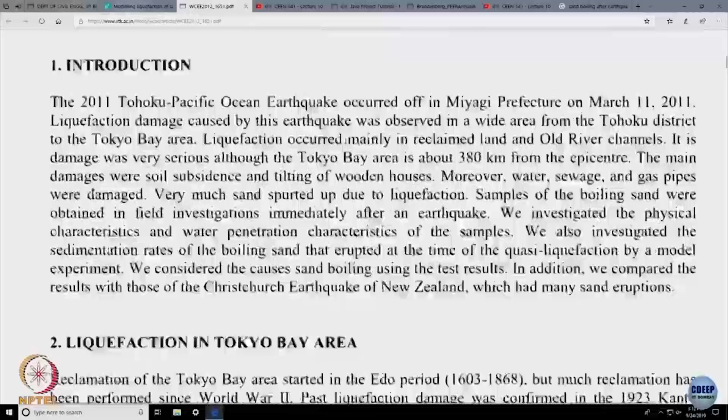We have to define a few terms, like what is the hydraulic gradient and what is the seepage force acting on the system. There is an interesting paper you should go through. In 2011, when the earthquake occurred in Japan, sand boiling characteristics were modeled. Everything comes from basic principles like liquefaction, sand boiling, grain size distribution, and permeability.

I am intentionally showing you this paper because many people think R&D is something extraordinary, but truly speaking, R&D is also simple concepts which you pick up from third year onwards, and then you build on them to answer the questions society is asking.

So this is how sand boiling has occurred, sedimentation has taken place, and all the roads are liquefied. Look at this - that is because of the sand boiling which has occurred. A lot of sand gets water because of the extremely high water pressure, over pressure.

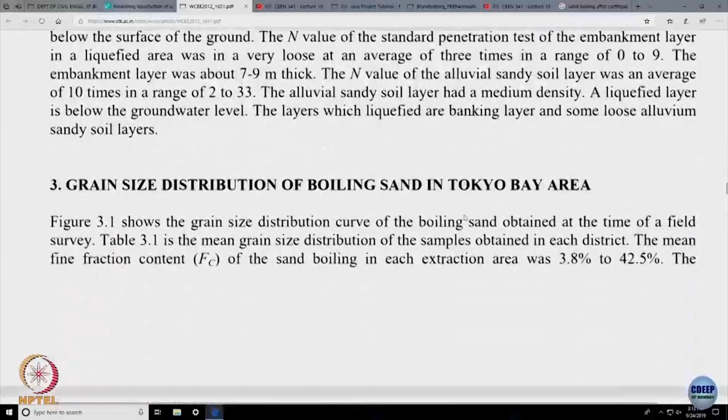And some intrinsic material properties will get lost in the form of loss of fines. There is another interesting video - this is work I did along with my BTech student.

This video is quite interesting - how seepage piping and sand boiling occur. We will try to model these situations. So this becomes my control volume of the sample, and then I may create different types of seepage conditions. We can change the H values which cause the hydraulic gradients.

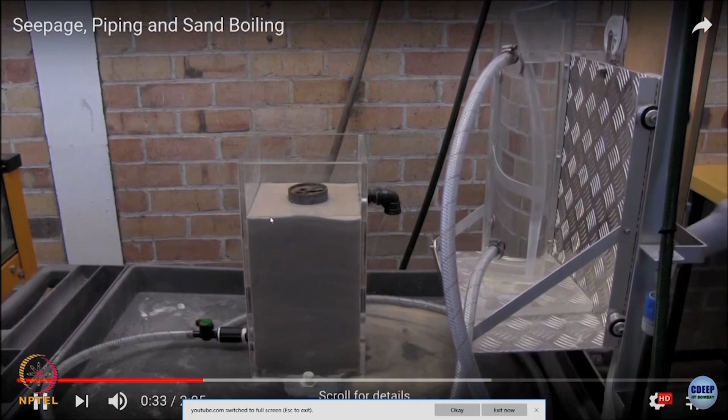Look at this video - now you will see the sand start boiling at this point. The moment you raise the height up to a certain level, this is known as the critical hydraulic gradient, which we will discuss in class. The discharge occurs in no time.

Look at this - the sand is fully saturated, and the whole thing has become almost like a straight line. This is the time when the sand starts boiling like this. This is the condition where H by L is going to be valid, otherwise not.

Remember, the seepage is being applied from the bottom. There is something known as piping - the answer for piping will also be obtained from this type of model. The moment you open it, you can see the pipe formation over here.

This is the main cause of failures of dams and embankments which rest on sand or sandy soil. Look how the entire system has lost strength. These are good videos.

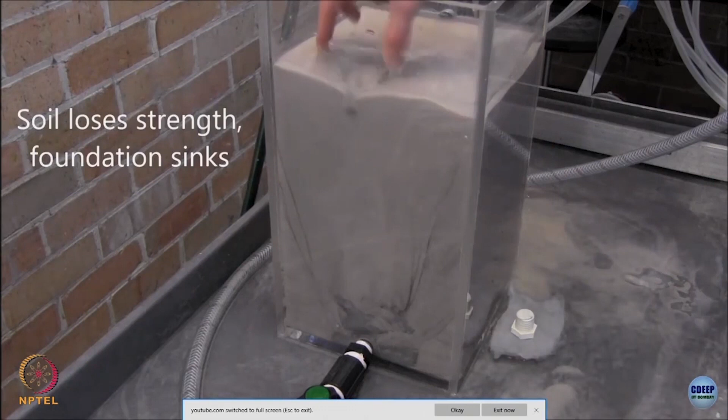I will just show you for one minute. This is the pipe which gets generated in the sand bed because of the gradients, and then the whole thing liquefies. Watch this video.

Concentrate at this point - when you increase the height of the water column, the entire sample might yield, and that happens at the critical hydraulic gradient. So look at this soil, it has caved in, because of the boiling process and loss of strength.